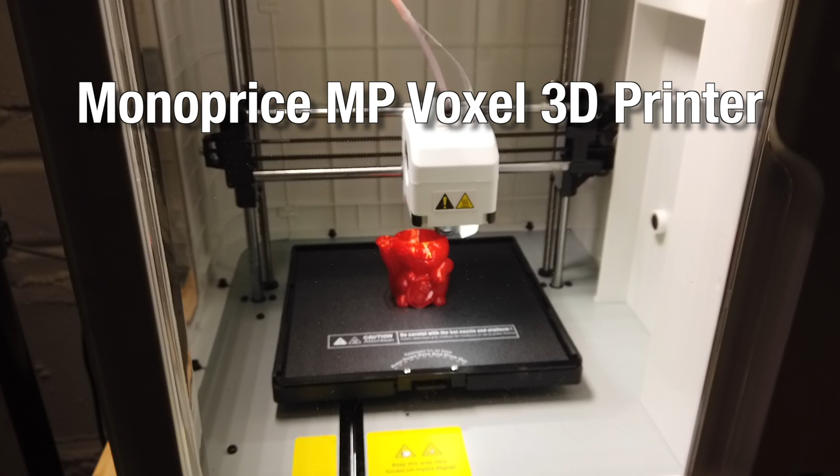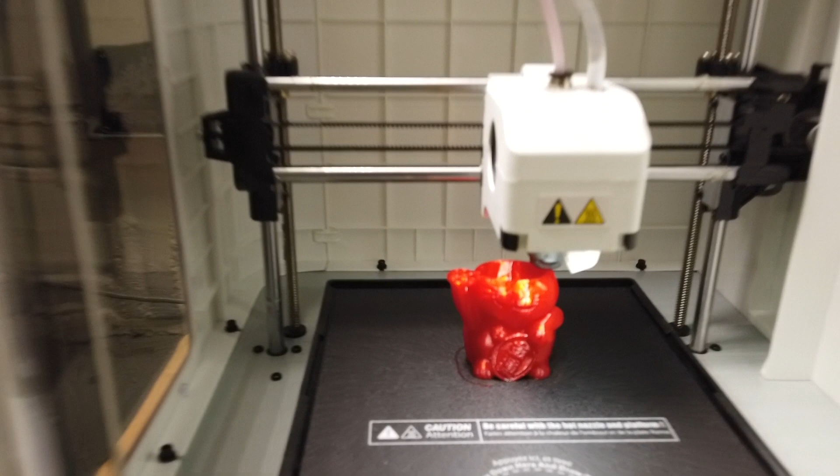So we're going to take a look at the camera. We're in the middle of a print. Let me open the door and let's have a look inside. Pretty loud in here, but over to the right, there is the camera.

And the camera is taking constant pictures over your object. Let me close this again so it doesn't get too cold in there.

I do have a light here, an LED light. If I turn that off, then we just have the light from the extruder. And the more light we have from up here, the better the picture is going to be from that camera in there. So it has to do with how much light this whole enclosure has.

And let me show you how you can access that. Alright, so we have the software that came with the printer, the FlashPrint, and right now we are printing this cat here, the money cat.

That's what it is. And this video is about finding out how can I connect to the printer, how can I see the print status.

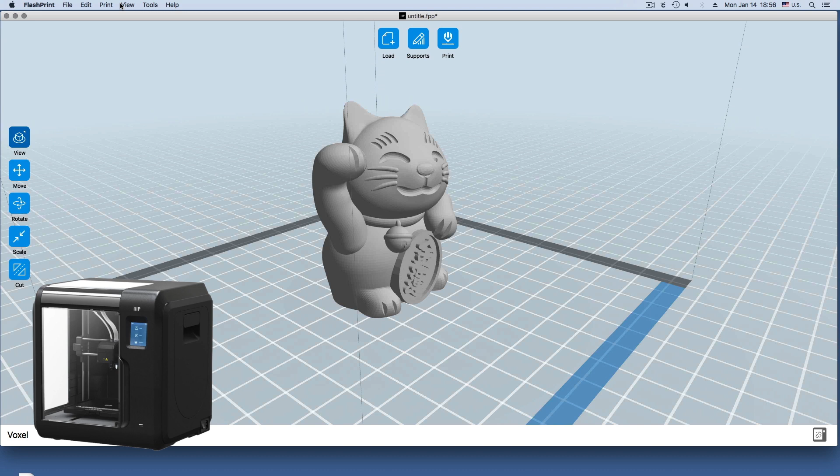One thing is here where we look at the print tab up here, we can connect to the machine, right? And we can go either wireless or with wire. In my case, I'm connected through Ethernet, a cable straight connected to it. And then I can push connect, and then I will see the printer status down here.

In the right corner, right? I can pause it and stop it. We are at 60% progress. We have here the wanted platform heat and the extruder heat: 210 we want, 210, and we want 50. On the left side is what we have right now, what the sensor is measuring. It's hovering around in that area.

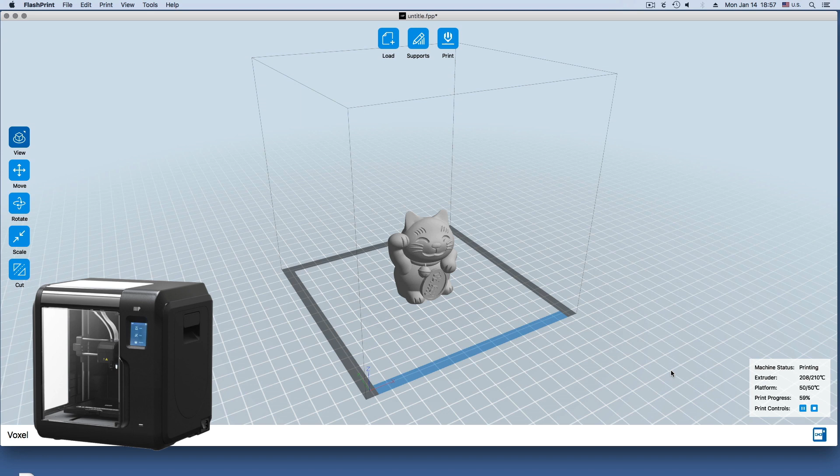So the question is now, how do we access the camera and this whole thing? I'm going to use a web browser here, Google Chrome for example. But you can also use your phone, your iPhone or whatever you have there. I'm going to show this in a second. Let me show this one first here.

So what you would enter is 10... yeah, I had it already there. 10.0.0.25, colon here, and then 8080, and enter. And then you get to this website.

This website is made by the printer, and down here in the middle of it, it is showing already an image from our print right now. There's a description of the server. It is an MJPG-Streamer running on that printer. We have here an example of a static image, or here the stream.

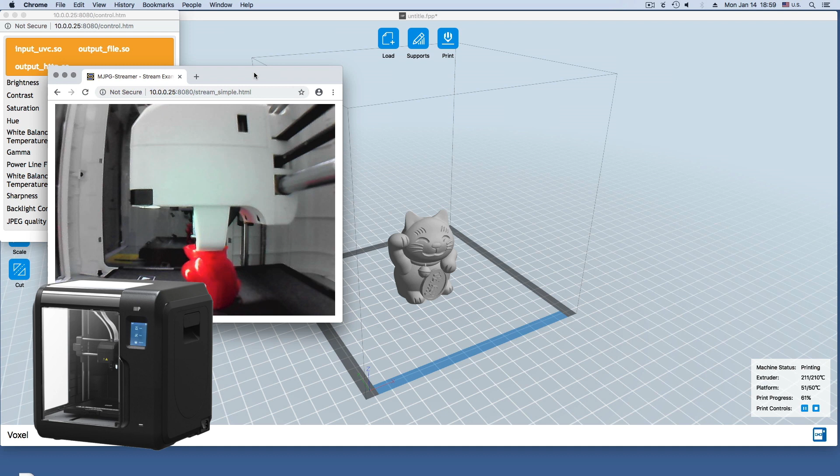You can see this here, right? So if you want to see, there's then a Java description of this streaming software, what streams the stuff. Here is the control for the camera. And here is the stream, and a simple stream would be here. So a simple stream just takes out the picture. Look at this, you can take this and make it smaller and put it here to the side, and then you see it.

Now, as I said, here is the printer settings, so you see the IP address here, 8080/control.htm. That's where you would control the camera itself.

And then at the same time we can go and use our phone. Now I'm going to try this to record this here on my phone. I need a browser, I go to the same address and we go to stream simple here.

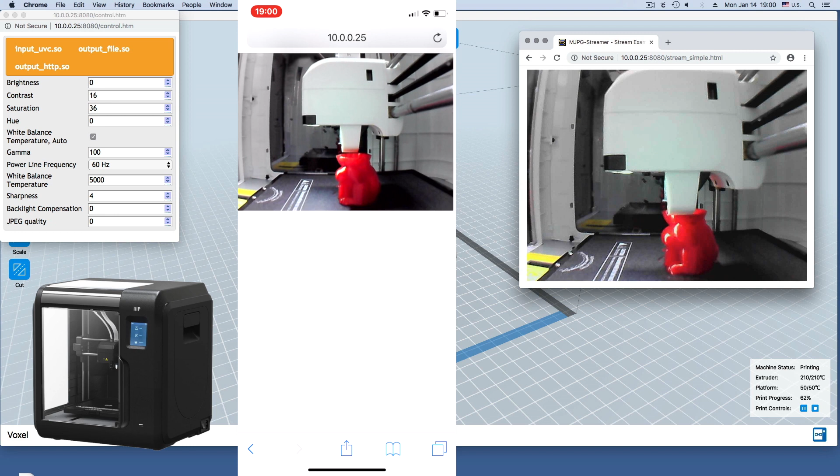And then I can zoom in on the phone. I can zoom in if I want to. See that? I can close, get close, or whatever. But yeah, then I can watch on my phone basically the same thing, right? So how far is my print or not? I could take screenshots here or whatever, and work it from there.

Yeah, that's how that works.

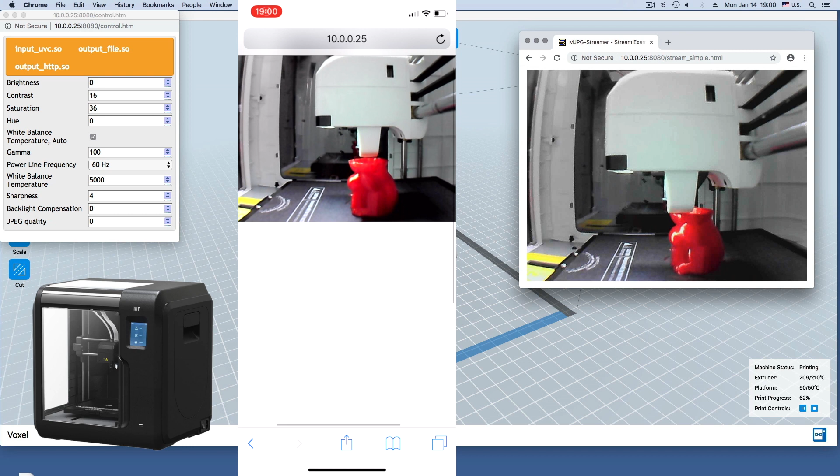Yeah, that's how easy it is to watch the images on that printer.